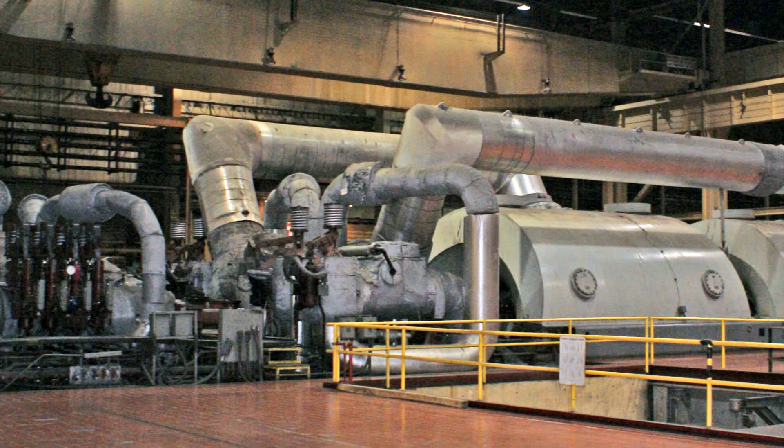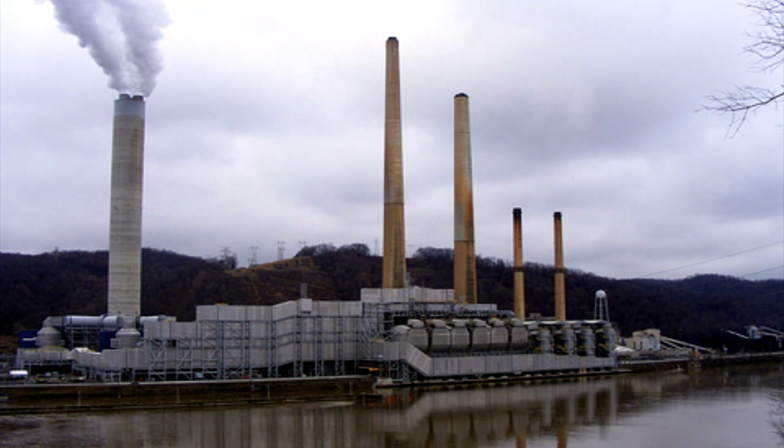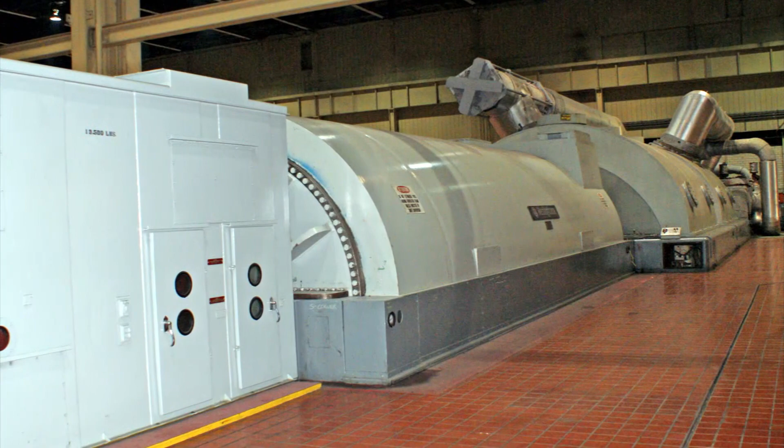Murphy's Law holds that if something is going to go wrong, it will do so at the worst possible time, in the worst possible place. For First Energy Corporation of Akron, Ohio, Murphy was in fine form in January 2011 at its Sammis station in Stratton, Ohio. First Energy's Unit Number 7, 835 megawatt generator had thrown its rotor at the peak of the winter lighting and heating season. What's more, the generator was located astraddle two building bays with structural steel obstructions directly overhead.

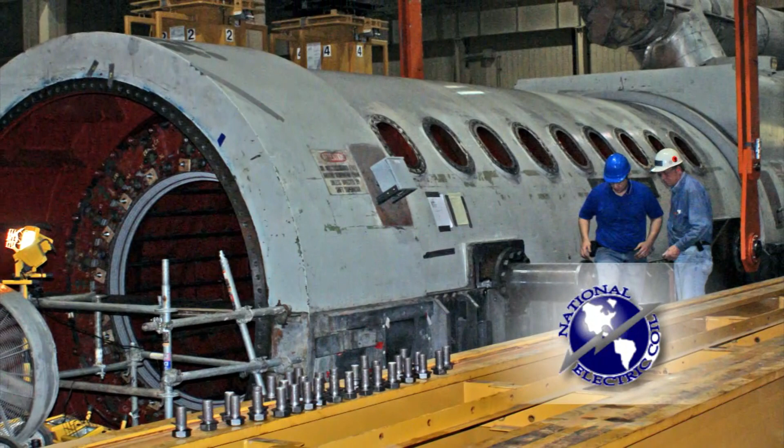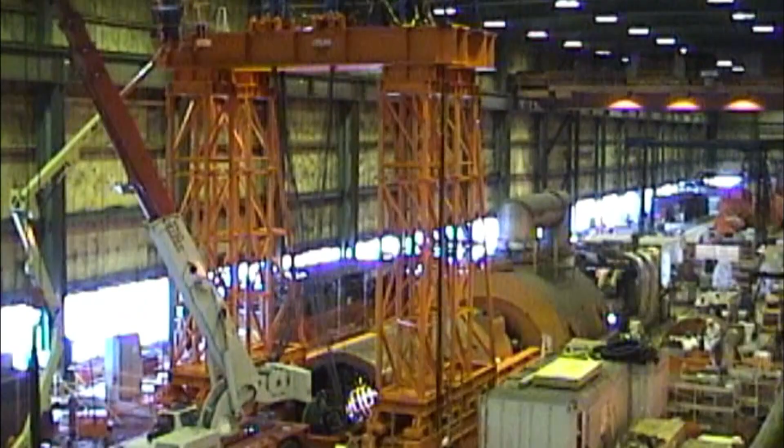First Energy contacted National Electric Coil to perform the emergency repairs to the generator, and NEC contacted Atlas Industrial Contractors of Columbus, Ohio. It was not the first time NEC and Atlas had worked together on a generator rebuild. Atlas had successfully performed a similar feat for National Electric Coil on behalf of American Electric Power's Conesville station in Conesville, Ohio. This time, the call came in the middle of the night in the first week in January. By the second week, a bid had been prepared and submitted, and by the third week, the job had been awarded to NEC and Atlas.

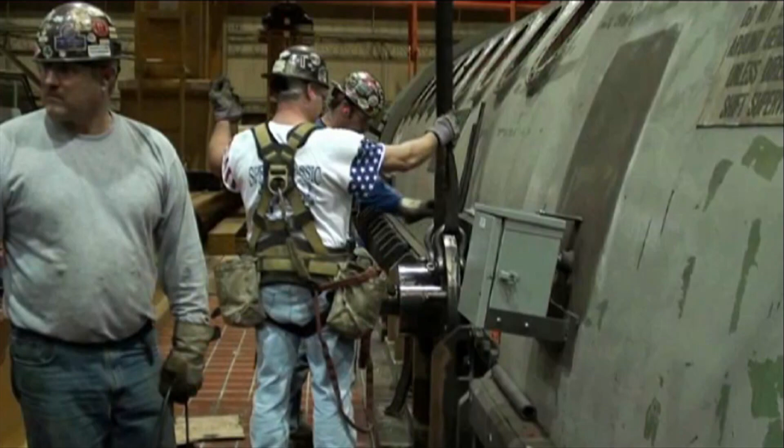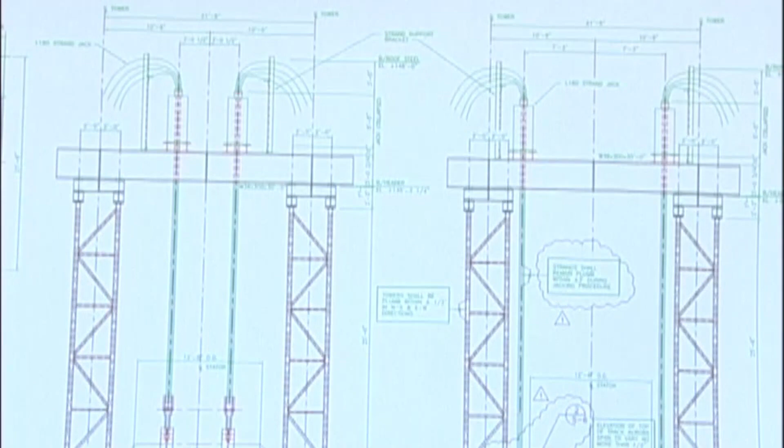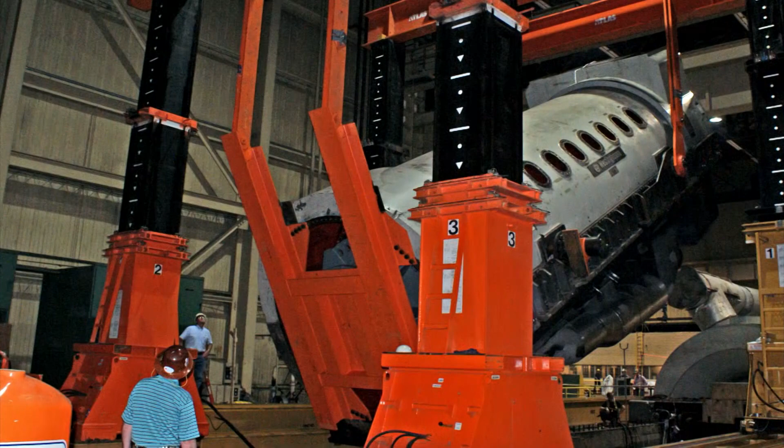The first problems facing the team were decisions on means and methods. NEC's method for repairing the generator, comprised of a stationary stator housing and a spinning rotor, is to first upend the stator housing. But because of the overhead obstructions at Sammis Station, the stator housing would have to be relocated before upending could occur. Atlas quickly realized that utilizing its tower lifting system, as employed in the AEP Conesville project, was not possible at Sammis Station because of the overhead obstructions. The decision to use a hydraulic gantry system was quickly arrived at, and a 1,000-ton unit was soon procured from Rigging Gear Sales Incorporated. But the rest of the project would not move as swiftly.

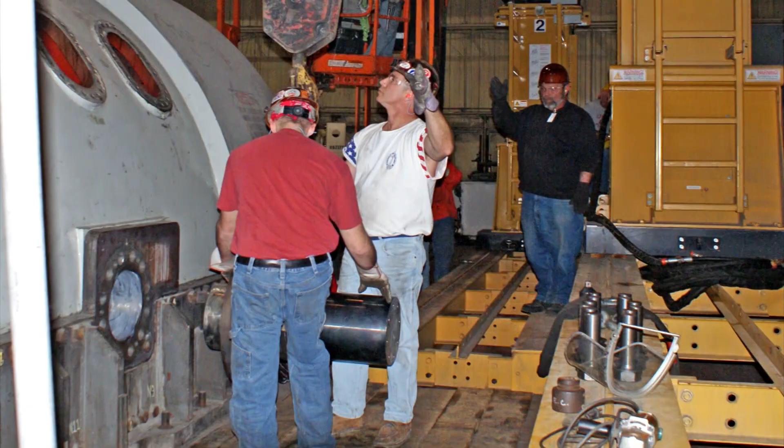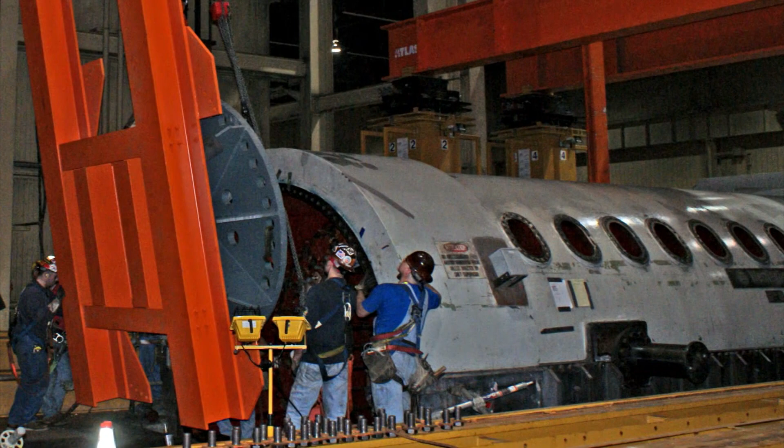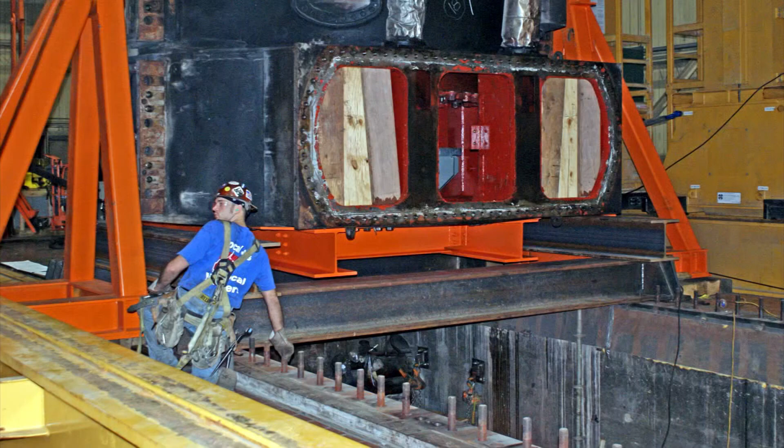While NEC and Atlas were old hands at this kind of undertaking, First Energy was not. There were so many unknowns, so much for the client to consider. Time and expense, of course, but also potential damage to the stator housing as well as to the turbine pedestal. First Energy explained it this way: "You may do this for a living, but we sell energy, and this generator is how we make our living." Adding to First Energy's unease was the opinion of Siemens, the OEM of the generator, that the end bell would deform during the lift or while resting on the foundation during the core installation, irreparably damaging the generator.

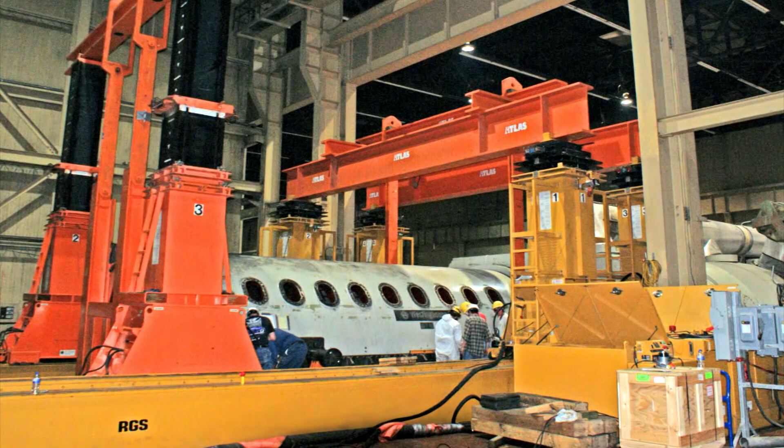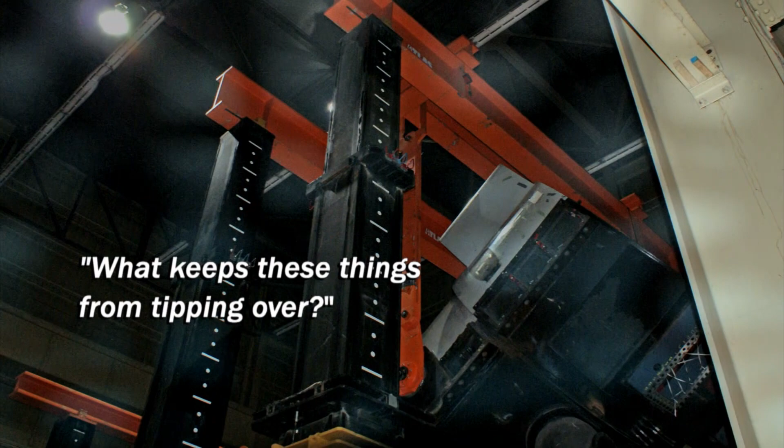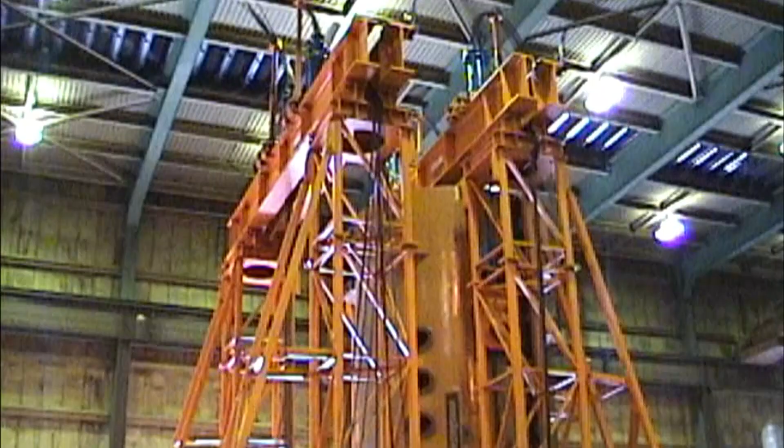First Energy elected to retain an independent engineering consultant, who, incidentally, had never even seen a hydraulic gantry in operation. One of the first questions asked during the initial review of the lift plan was, what keeps these things from tipping over? To address concerns about damaging the stator during the lift process, Atlas hired Ruby & Associates of Farmington Hills, Michigan, which had worked successfully with Atlas on countless lifting projects, to perform a finite element analysis of the stator housing and prepare the lift plans.

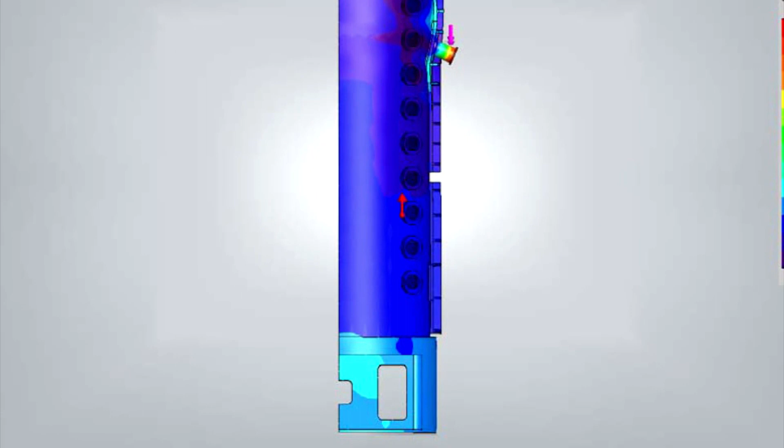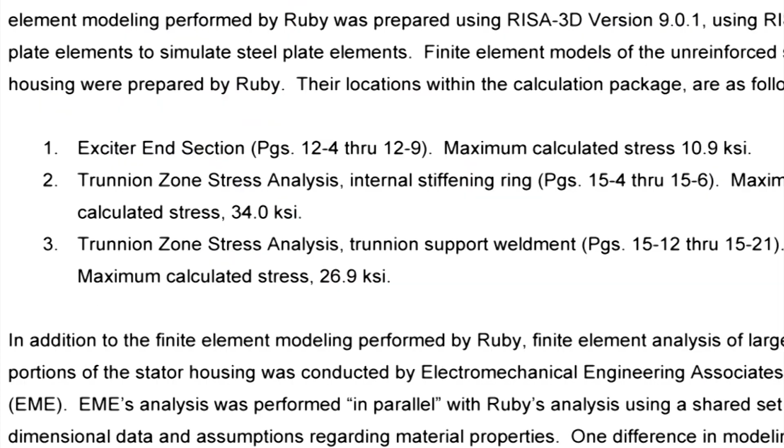Based on the finite element analysis, it was determined that reinforcing plates should be temporarily installed on the stator housing during the rebuild. Even though analysis showed that the belled end of the housing could support the stator weight, to allay First Energy's and Siemens' concerns, support stands were designed to distribute some of the weight of the stator to the lower trunnions. Given the additional owner requirements, the engineering budget grew to 3 times initial projections. Despite the protracted approval process and additional engineering requirements, by mid-February, 5 weeks after initial contact, all specialized components had been fabricated and the lifting system was installed in place. The stator was now ready to be relocated and rotated.

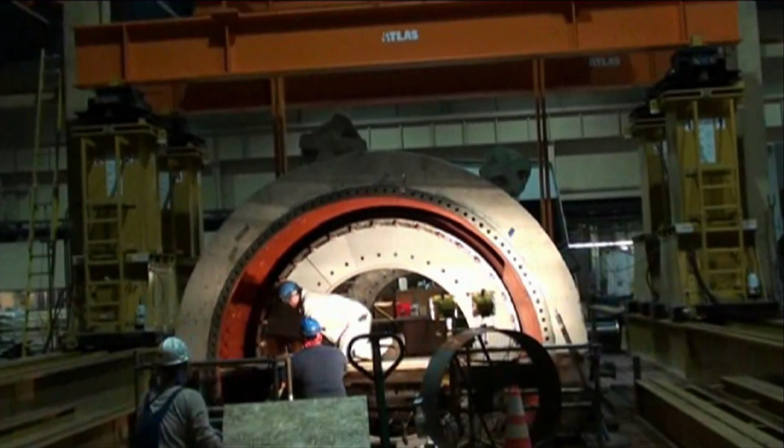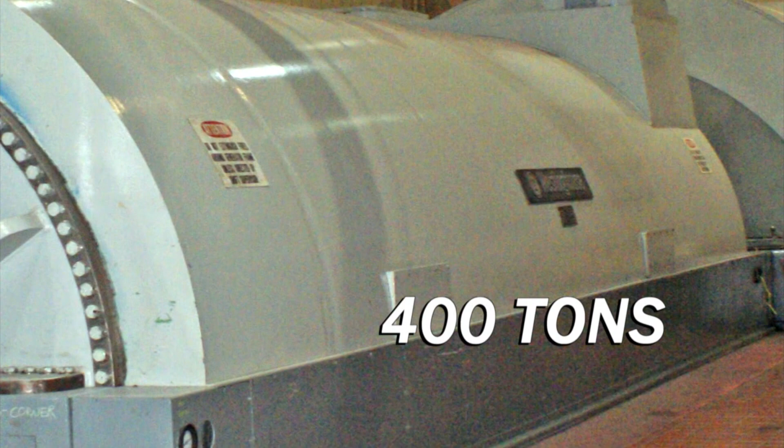In preparation for the lift, First Energy had removed the rotor from the stator housing, decoupling the generator from the turbine. NEC had removed the existing core, comprised of approximately 750,000 individual laminate plates with a total weight of 400,000 pounds. Given the reduced weight of the empty stator, this would clearly be the easier part of the move. Fully assembled, the generator weighed 400 tons, and the plan and the engineering had to account for this. Due to the constraints of the building, Atlas employed a lift system's 1,000-ton gantry system with an overall height elevation of 40 feet, necessary to complete the upending and downending of the stator frame.

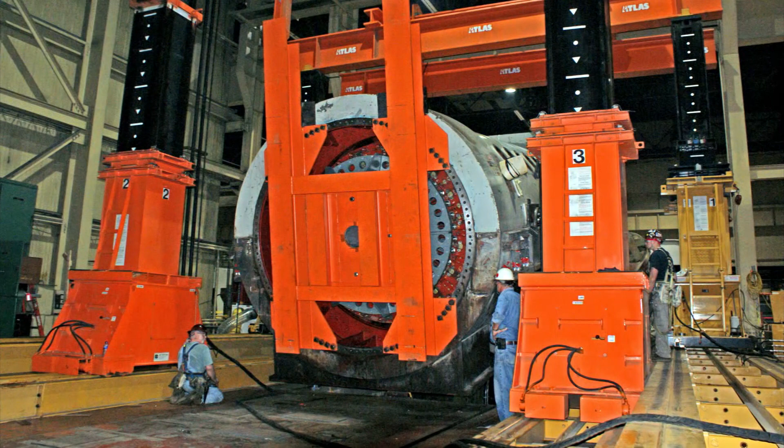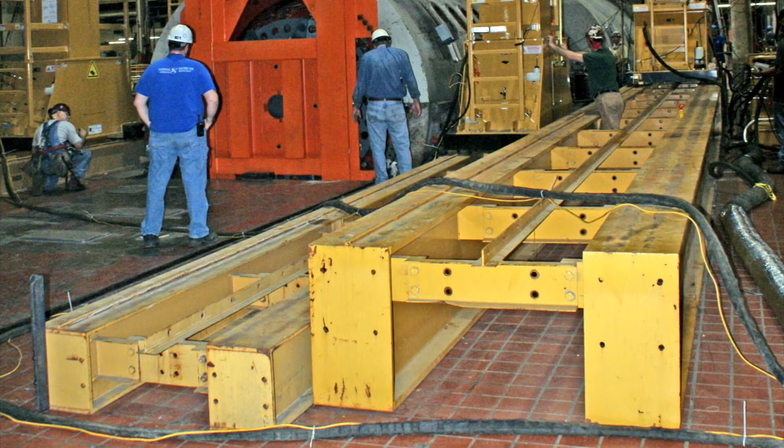Atlas also employed two legs of its 500-ton gantry, connected to Atlas's tailing fixture to act as the tailing gantry during the lift process. 80 feet of 30-inch track and 30 feet of 15.5-inch track were deployed to support and direct the rolling gantries. With the gantries and tracks in position, the next step was to install the reinforcing plates on the side of the stator and mount 4 trunnions on the stator housing.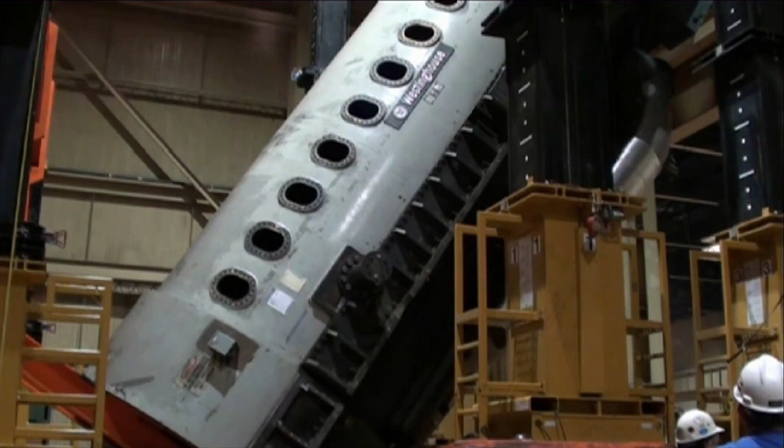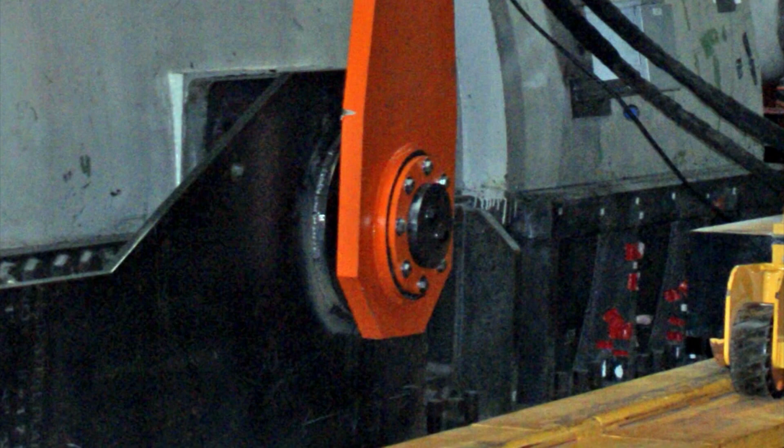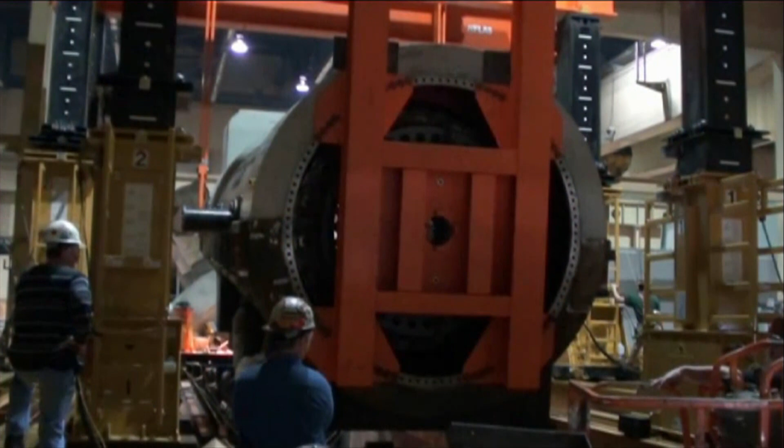During the design phase, Ruby and Associates determined that using conventional rigging methods, high friction forces would have to be overcome during the uprighting, or there was a very good chance that the stator and lift system would lurch unpredictably during rotation as the friction between the bearing surfaces was periodically overcome. In response, Atlas and Ruby developed an innovative ultra-low friction bearing that was incorporated into the lift links. The lift links, as well as the lift trunnions and other specialty components needed for the lift, were fabricated by Atlas Steel. The lift links fit snugly over the upper trunnions and assured a smooth uprighting process, which greatly assisted in keeping the assembly in a plumb condition throughout the lift. Installation of the gantry header steel followed next. The primary lifting beams on the 1,000-ton gantry were two 35-foot W36 by 361 I-beams.

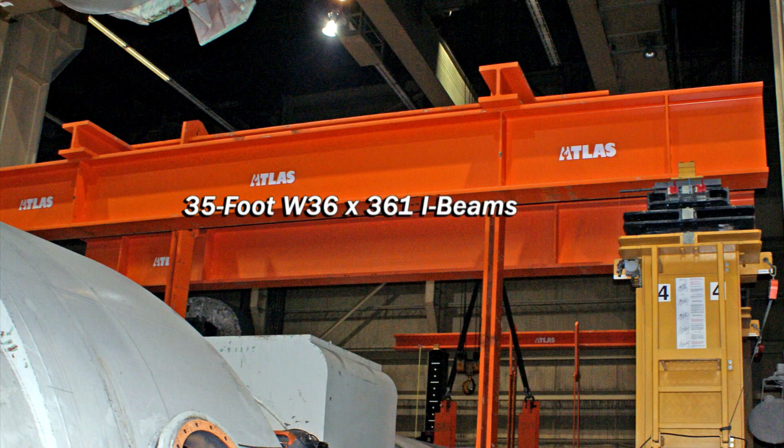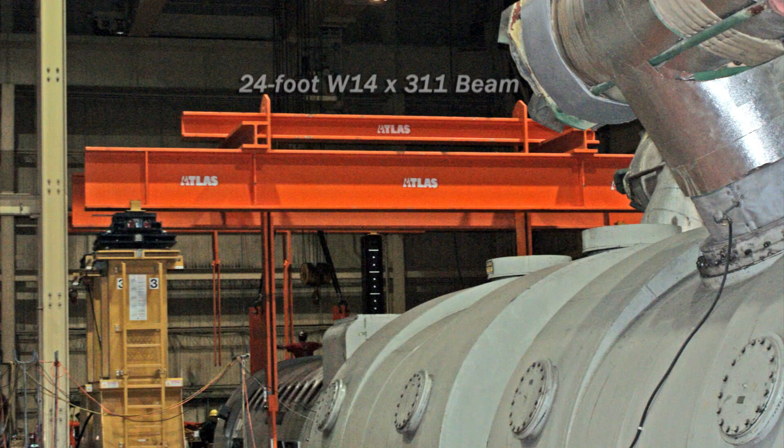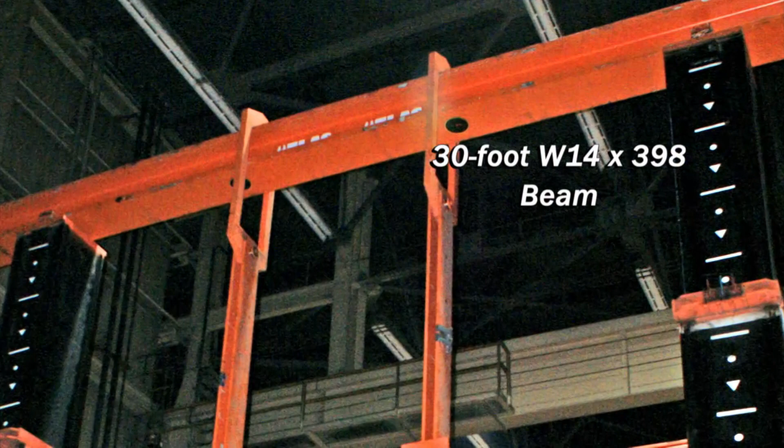The W36 beams supported two transverse W14 by 311 beams, each 12 feet long, which in turn supported a single 24-foot W14 by 311 beam to which the lifting links were attached. For the 500-ton gantry, a single 30-foot W14 by 398 beam was more than sufficient. All the rigging apparatus and lifting links were supplied or fabricated by Atlas.

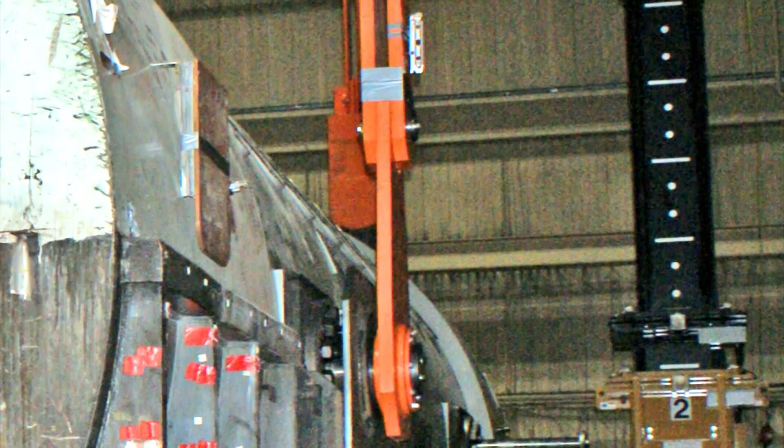To assure the lifting assembly remained plumb throughout the project, magnetically attached lasers were installed on the lift links with targets on the beams overhead. Throughout the project, the laser beams could never be more than 3/4 of an inch out of the target centers. They never were.

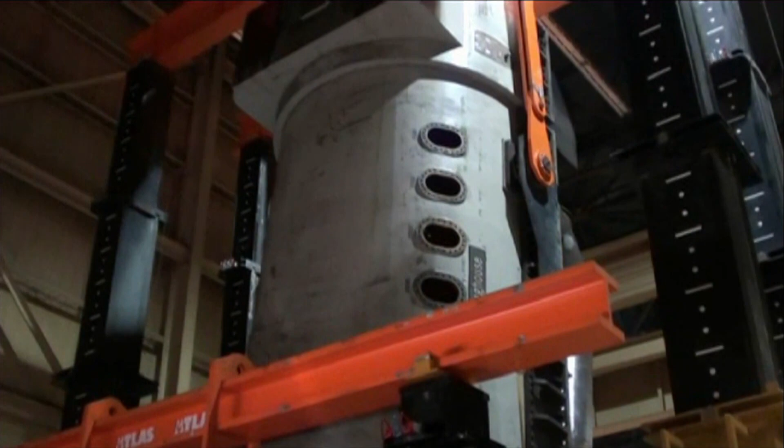In order for the stands to share load with the end bell of the stator, as the stator gradually increased in weight due to the reinstallation of the laminate plates, shims were installed under the stands at a critical point in the restacking process. Shims were also employed under the steel grillage supporting the stator end bell to provide uniform contact of the stator bell against the steel. This ensured that stress in the stator shell was uniform, with no local stress risers that could buckle the stator housing.

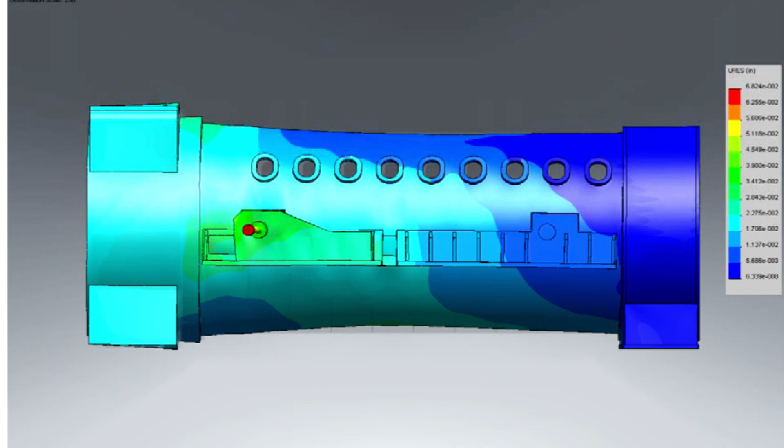As always, safety is paramount in Atlas's pre-job planning and project execution. Atlas's dedicated safety manager and project management prepared and submitted pre-task planning and job hazard analysis to both NEC and First Energy for approval. All project personnel attended First Energy's site-specific safety orientation and power source locations and lockout-tagout sessions before work was begun. Once these sessions were completed, Atlas conducted its own full-scale safety orientation, including individual instruction of all project members and walkthroughs of all phases of the project.

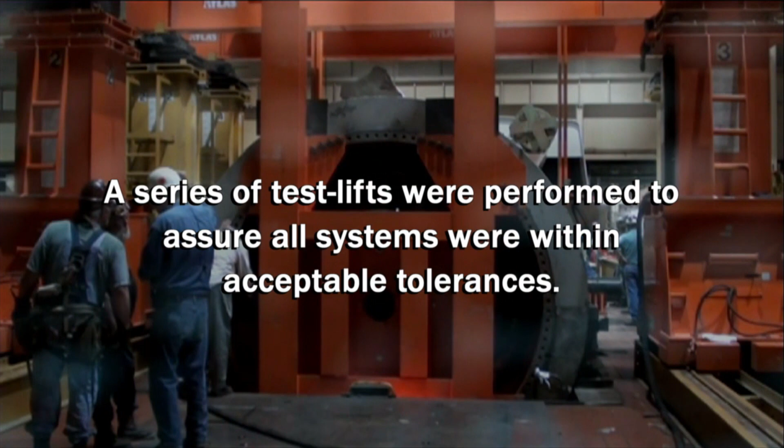Thereafter, daily on-site safety meetings were held, assuring each team member was fully briefed and safety conscious. Next, a series of test lifts were performed to assure all systems were within acceptable tolerances. Prior to each of these heavy lift activities, Atlas and First Energy gathered all personnel involved to reinforce and run through each step of the plan and sign off on the Atlas critical lift ticket. Now, with everything in readiness, the move could begin.

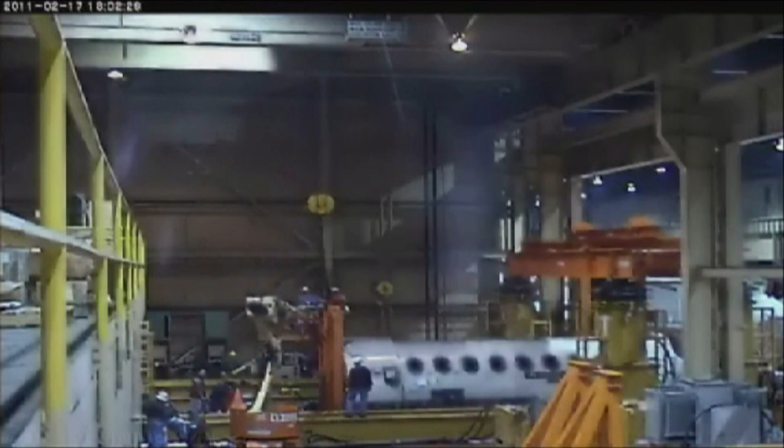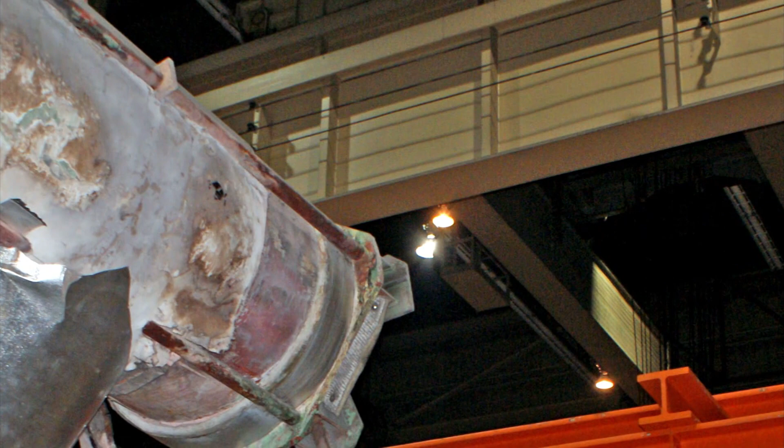Atlas now attaches the tailing fixture using the station's overhead crane. Most of the fittings employed in this process made use of components originally designed and constructed for the AEP project, saving First Energy time and money on its repair. With the tailing fixture in place, the generator is moved away from the turbine in a series of coordinated vertical lifts and horizontal gantry movements to keep the stator and attached piping clear of the turbine and generator foundations. Of course, it was equally important to maintain clearance with overhead obstructions, which precipitated the need for the horizontal movement.

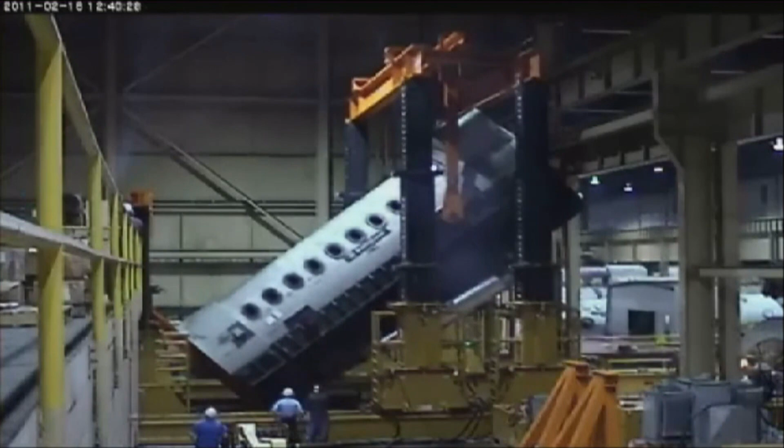As the tip-up operation began by raising the 1,000-ton gantry system at the turbine end of the stator, the 250-ton system was used to synchronize with the movement of the 1,000-ton system during rotation of the stator. Pre-planned hold points were built into the lifting schedule to ensure all axes of the stator and gantry systems were within allowable tolerances.

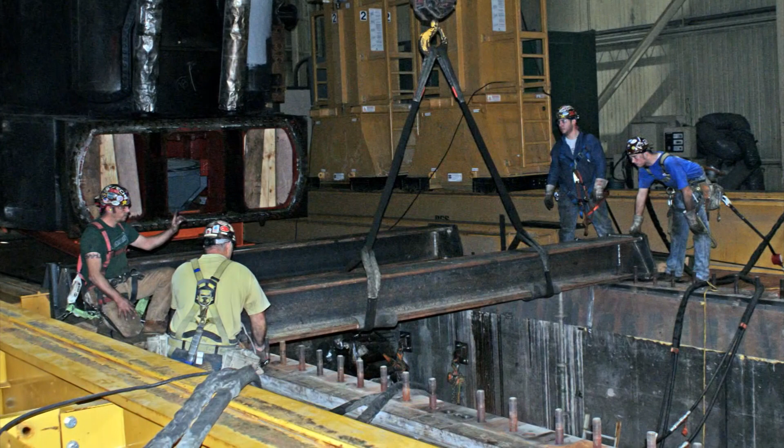Once the stator housing was vertical, it was moved to the far west end of the gantry tracks. At this point, the support steel grillage of the W14 by 176 beams spanning the generator foundation were put into position, and the lower trunnion support stands were moved into place. The stator housing was then repositioned over the stands and grillage.

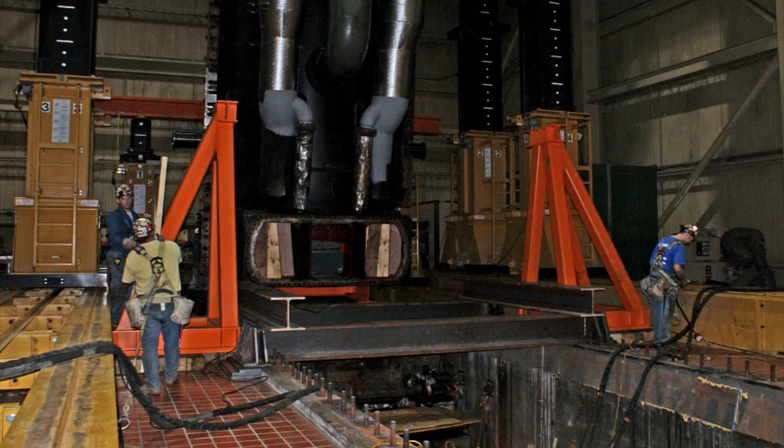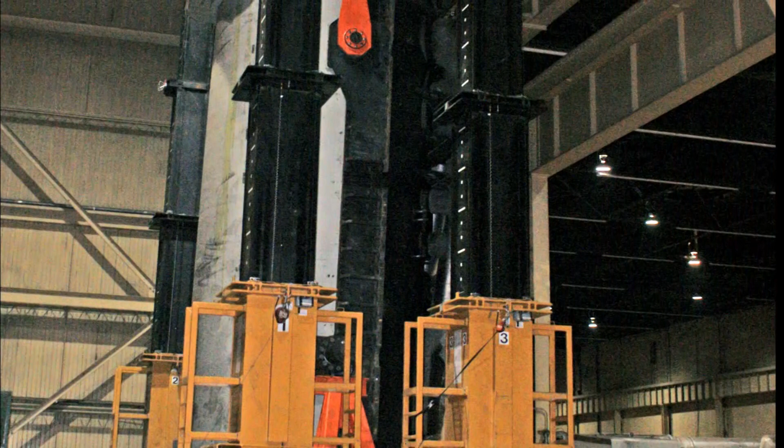The gantries were lowered until the stator housing came to rest on the steel grillage, and the initial shims were installed on the lower trunnion stands, leaving a small gap so that no load would be initially transferred to the stands. From the time the lift began until the housing was safely at rest on the grillage required about 4 hours. For Atlas, the project now paused.

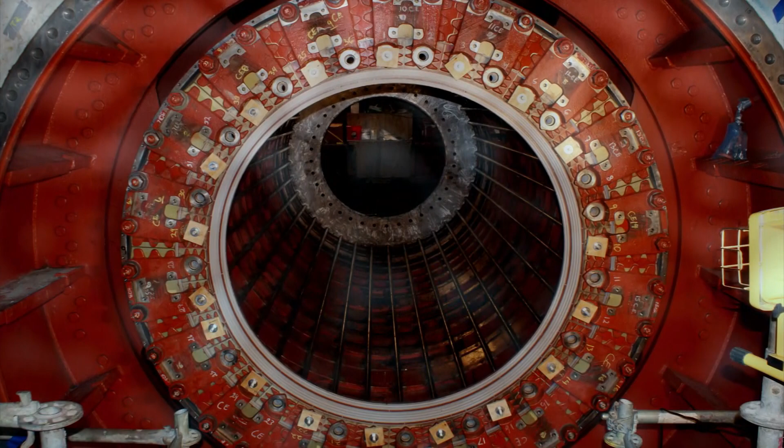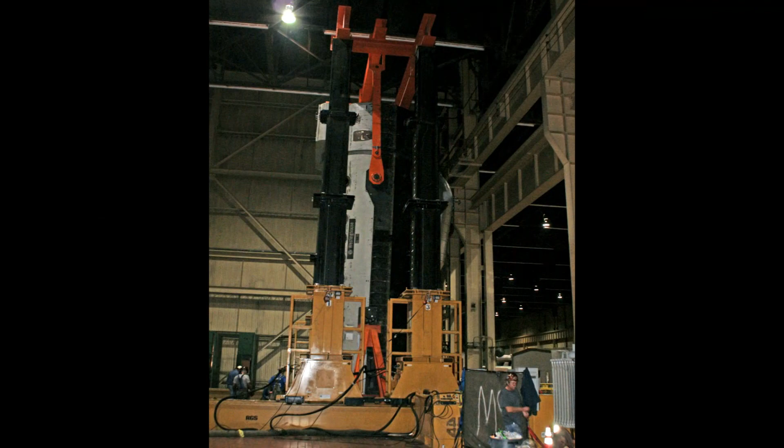While the rotor was sent off-site for repair and rebalancing, NEC began restacking the core with laminate plates, a procedure requiring a little less than 3 months. Once during restacking, Atlas crews returned to the job site to install shims beneath the support stands. This allowed the stands to support a portion of the additional load added during restacking. With the rotor and 3/4 million laminate plates reinstalled, the stator weight was back to its original 400 tons. It was now time to return the unit to horizontal.

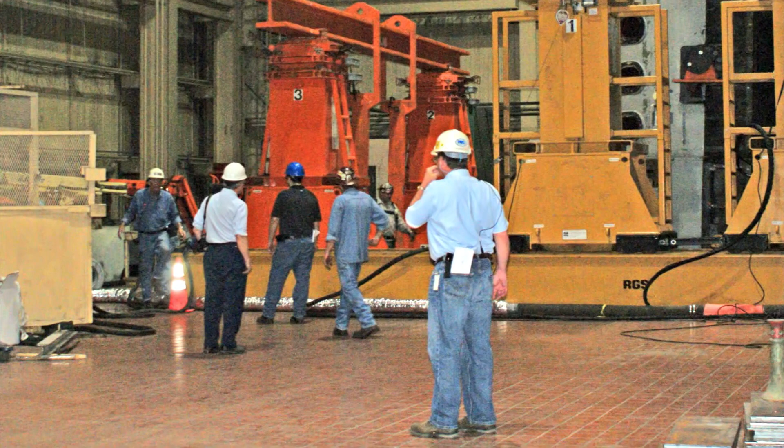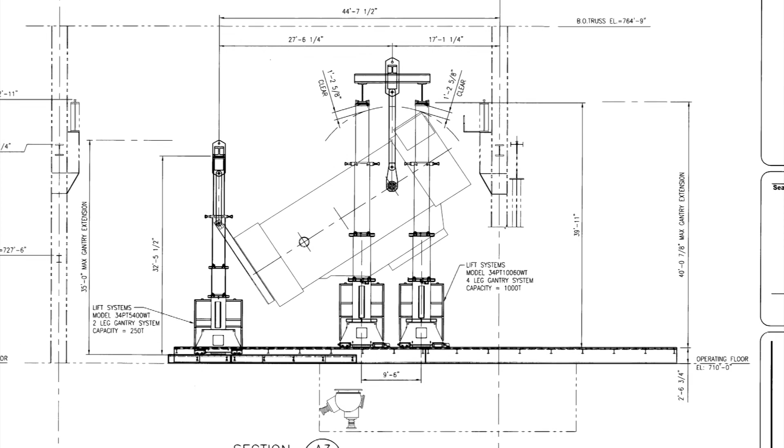It's worth noting again that the unit was now twice as heavy as before. Gantry lifting pressures and the tractive effort to overcome rolling resistance would be markedly different for this part of the procedure. Once again, First Energy required the same assurance that Atlas was up to the task, requiring a string of signatures on all plan documents that reached all the way up to First Energy's vice president level.

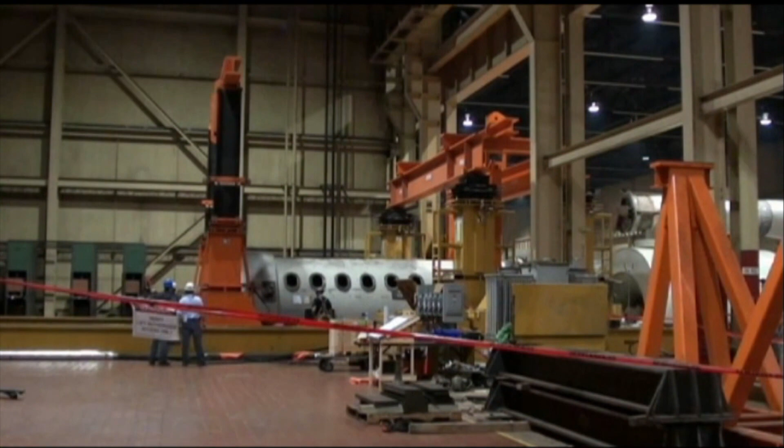With the stator clear of the support stands, the stands and the support beam grillage were removed from the lift area. Once again, the generator was repositioned through a series of coordinated vertical lifts and horizontal gantry movements. Atlas began remobilization for the laydown on a Thursday, and by Saturday afternoon, the job was complete. The actual downending and repositioning took about 3.5 hours.

In summary, Atlas completed the job with 875 hours of engineering, 740 hours of planning and project management, 280 hours for a dedicated safety manager, and 3,937 hours of direct labor. The entire job was finished with 0 safety incidents or recordables, under budget, and with complete customer satisfaction.

Sometimes, helping your client understand that you have the skills and experience he needs are as important as the skills and experience themselves. Atlas took the time to reassure FirstEnergy it was the right contractor for the job. Then it went out and proved once again that the toughest jobs take the Atlas touch.